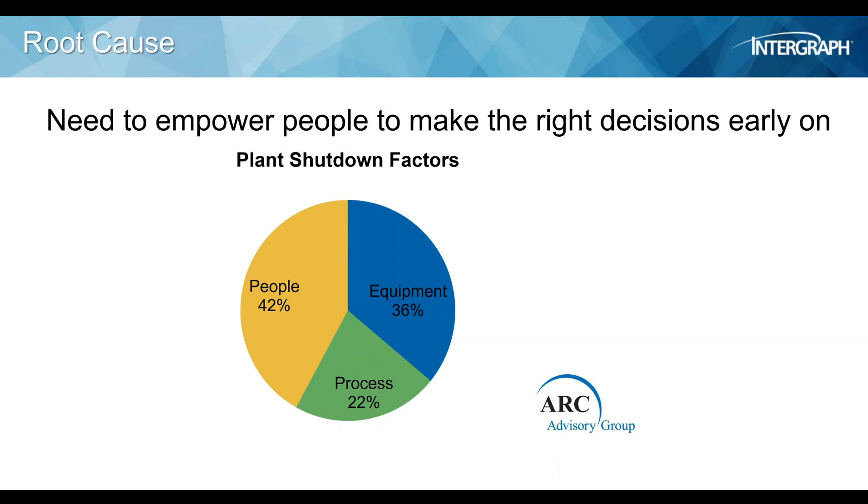It's just the fact that we need to empower the people at the plant with the right information. Right? I say information or data, because to me information is the data in context. That's very important, to have that information in the context of the task that you are performing. And I know for sure that we can definitely lower that 42% number, because obviously that's not a good thing. Here you see some other numbers from ARC, very interesting, that of course the biggest revenue loss is from operator error. And like I said, it's not intentional, it's just not having the right information at the right time, and with that not making the right decision.

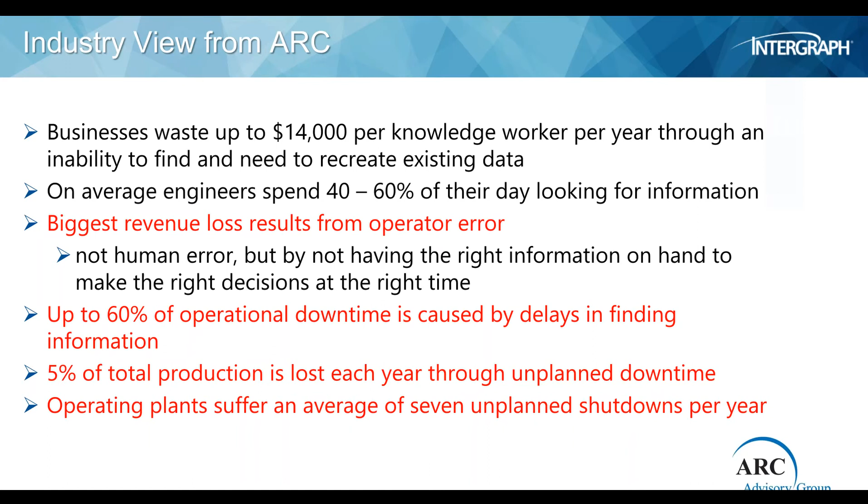And you see 60% of the operational downtime is caused by delays of finding stuff. Even I as an engineer, I know that I spend a lot of time finding stuff, and that's kind of not fun and boring. You want to have it quickly there and spend your time on the real work you need to do, either engineering or operating the plant. But you see tremendous cost is involved when you of course shut down a plant. On average 7 unplanned shutdowns, that's terribly costly. So we definitely need to do something about it, and I think we can do something about it with this engineering design basis.

Of course, the challenge is that these days these projects are very complex, and some of them are very large. I've seen projects like LNG plants that have 2,000 P&IDs. It's a huge facility in the Middle East, and for an owner-operator to check all this data and all these P&IDs in these fast-track projects, which seem to go faster and faster every time, is just a challenge, and it is almost impossible to do that by hand. And I'll talk a little bit about how a computer can help with that goal, to make sure that you get what you want, not only to build the plant but also to actually operate the plant.

That's a challenge. But like I said, I'll talk a little bit about how we can maybe help with that challenge to make sure that you have a solid engineering basis and can have the benefits of that in operations. Now, starting at the end is also making sure that you ask early on what you want as owner, and owners do that, and one of them is Saudi Aramco. I worked with the Saudi Aramco company for many years, and I think they did the right thing. It's a smart thing to, very early upfront, before you let the project, tell the EPCs what you want at the end.

Because sometimes you create like a P&ID, or you create like instrumentation. As an EPC, you only have one objective, and that is, get enough data to buy, install, and maybe commission, and that's it. But of course, after that, the owner takes over, and maybe he wants some additional information that he thinks is important and can help him in the operational phase. But if you don't ask, you don't get. And if you ask after the fact, it's going to be very difficult and or very expensive.

So that's what I said, start at the end, make sure that you define it up front. It's a lot cheaper, and it's a lot better, and it will get you the engineering information in the end that will help you in the operational phase.

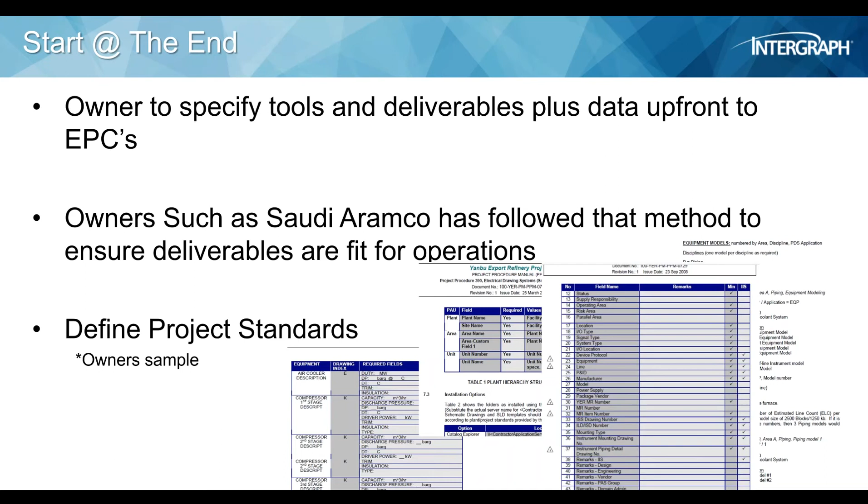So I want to get your opinion about what I just said. So we have a little poll question about what you think. So Ashley, maybe you can execute the first poll. We have two of them, later one more, to see what you think about that. Thanks, Frank. Yes, everyone, please select the answer that best applies to you.

Is finding the right information in context a challenge? Yes, we have challenges with accessing up-to-date information, or yes, but we will find it, it just takes longer, or no, we have it quickly and correct, or you don't know.

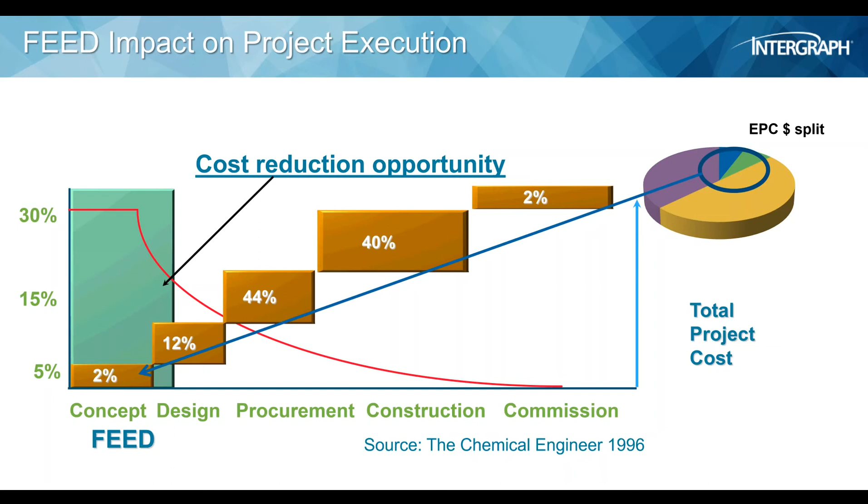The same is this domino effect. If you make some assumptions, that's what engineering is about, making assumptions early on and then refining it till you finally have the final design that you're going to implement. So there will be changes, of course. I don't think ever a project will be executed where everything is right in the beginning and you go one time through this whole workflow and be done. No, there are iterations, but of course you want to minimize this rework and iteration, so make the right decision early on. That's the trick, and not have this ripple through effect, or at least minimize the ripple through effect there.

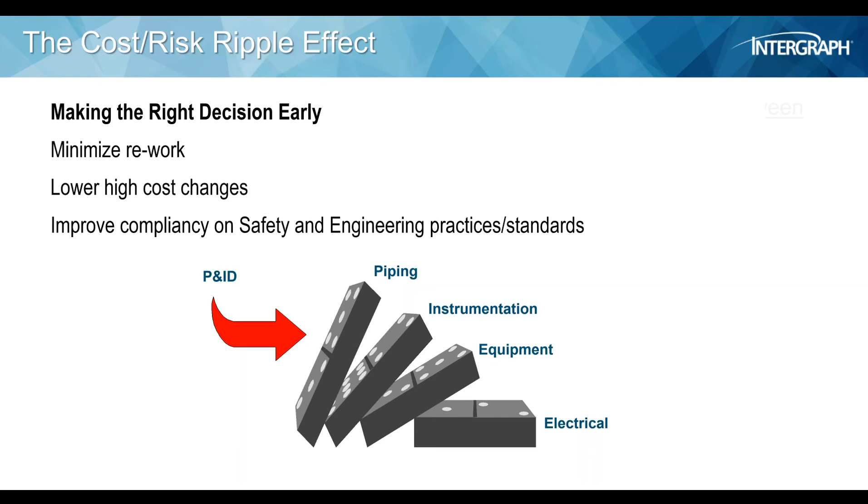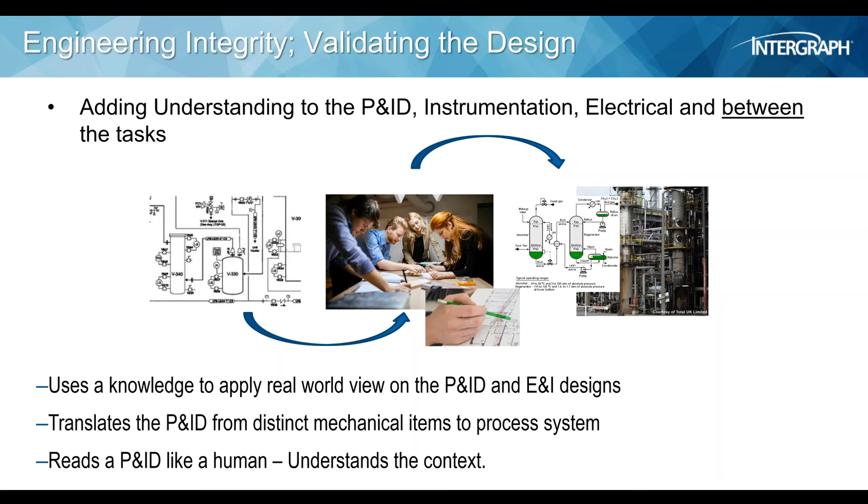So we need somehow to capture that information, capture that data, and automate that checking, at least for the bigger part. So we want to check on the topology, the data, the visual, the drafting stuff, like the right labels and symbols, because in the end, these deliverables, it's not only the P&ID, I just take that as an example, but they'll be printed and somebody has to read it, even if he takes it in the field. He wants to know if this valve is car sealed open or not, and that tells him something about how to maintain and operate that particular component. And of course against the standards, like I said, there are many of these, and also your own company practices and standards.

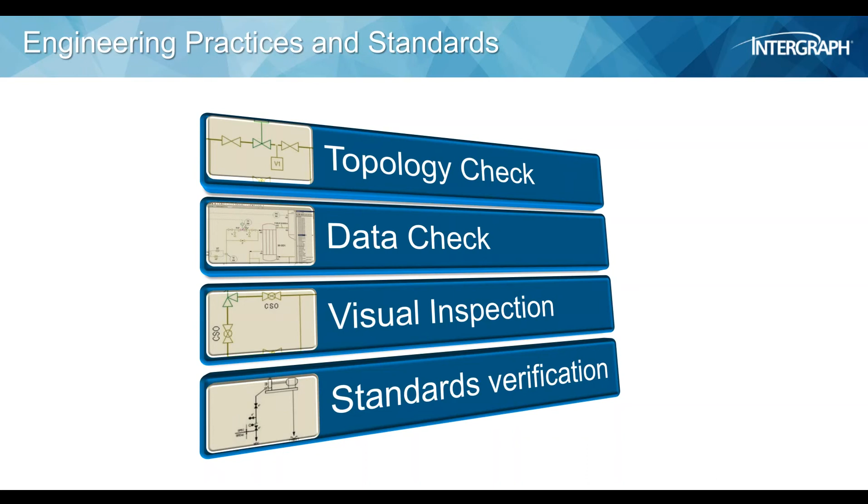So for instance, I have this little example, it's very, very simple, but you see this pressure relief valve configuration. All the piping and everything is hunky-dory. Now you have to basically test that pressure relief valve to make sure that the setting is right, it operates right. It's a safety instrument, so it needs to be correct. But little problem, if you can see, on the top line there is a drain missing, so they basically cannot isolate and drain it to safely test it. That's a problem. It can cause people to say, okay, I'm not going to test it. That's going to be later maybe a safety issue, so you don't want that.

So you want to make testing and checking up front that yes, this valve is there, and we can actually do that, and we can automate that for you to make sure that the design basis is right. So if the operator goes in there and wants to do the testing, then yes, all the components are there in the right place to do his work.

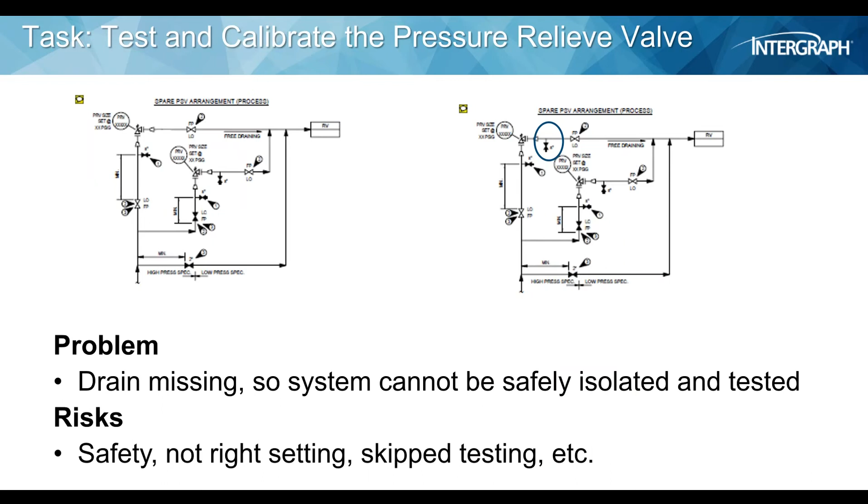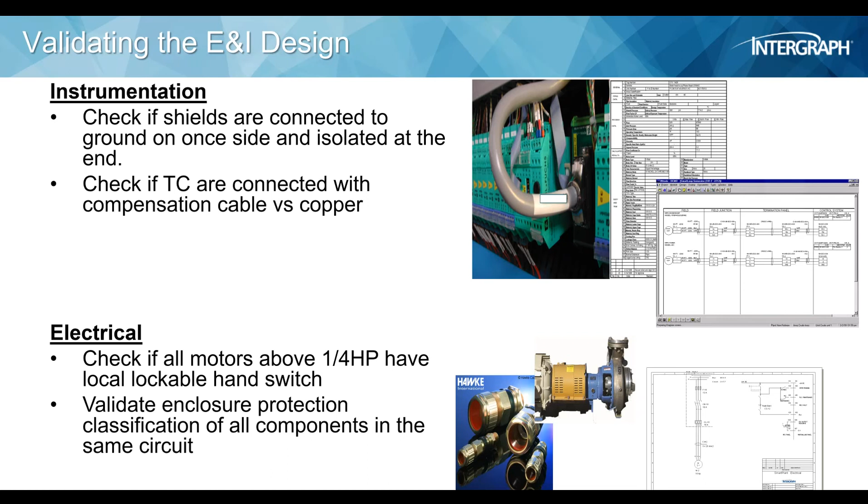And of course, I took the P&ID since that's such an important document for the plant, but the same thing for instrumentation, it's also very important. Check if you have the right cables for thermocouples, for electrical, if you have the hand switch when you do lockout, tagout, when you put your hand in the pump and somebody can switch it on. That's not very healthy, and have the right enclosures with respect to area classification and so on. So you can check that early on, so you have the right stuff, not only within the disciplines, but also across the disciplines, like across process, the P&ID and instrumentation.

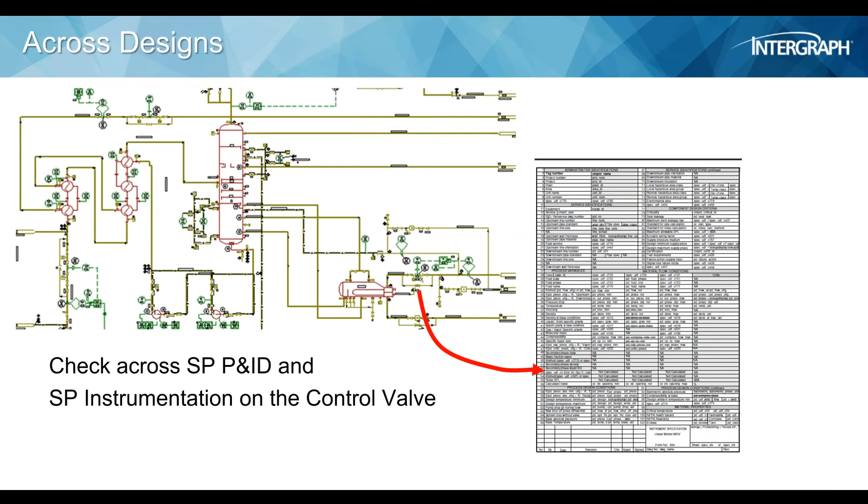Make sure you have the right valve, the right line sizes, the right process data to have a consistent data there for later on if you want to do some maintenance or replacement of that component.

Now the cool thing is, and everybody these days is asking for dashboards, so that's very fashionable, I guess. So we also show you here a little dashboard, and it's obvious that red is not good and green is good. But nice thing is when you're at the plant and you have done some of these checks against the design, because there's always changes during the running of the facility, so you can do this check on the EPC side, but also at the owner-operator side.

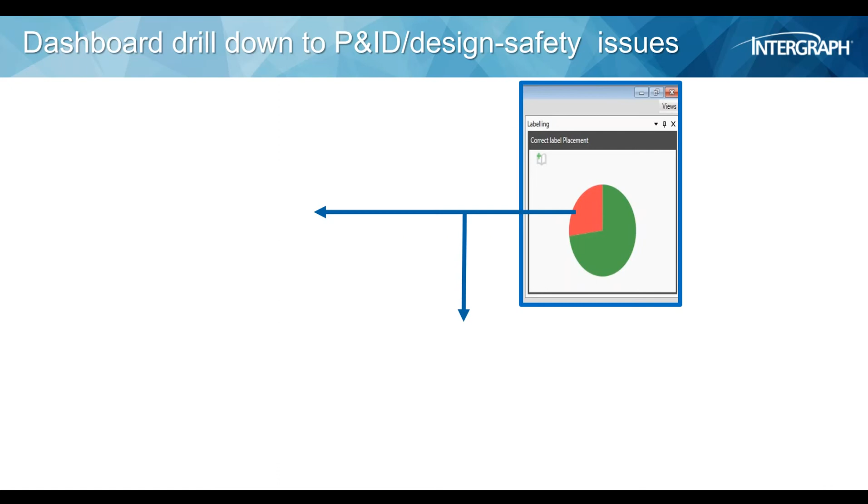You can actually click on one of those little tiles and navigate to see reports, and also actually a picture of, hey, what is actually wrong there? Can I live with that, or can I not live with that, and fix it?

But the thing is that you have all this information at your fingertips, and it's coming from one single source, rather than, I have my own P&ID in my desk that I marked up for the last 5 years, but somebody else has the same P&ID in his own desk that he marked up for the last 5 years, and guess what? They'll never be the same.

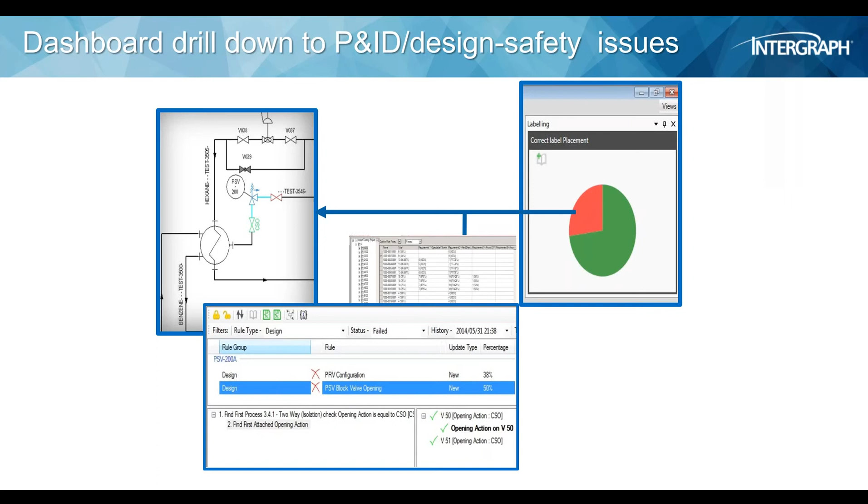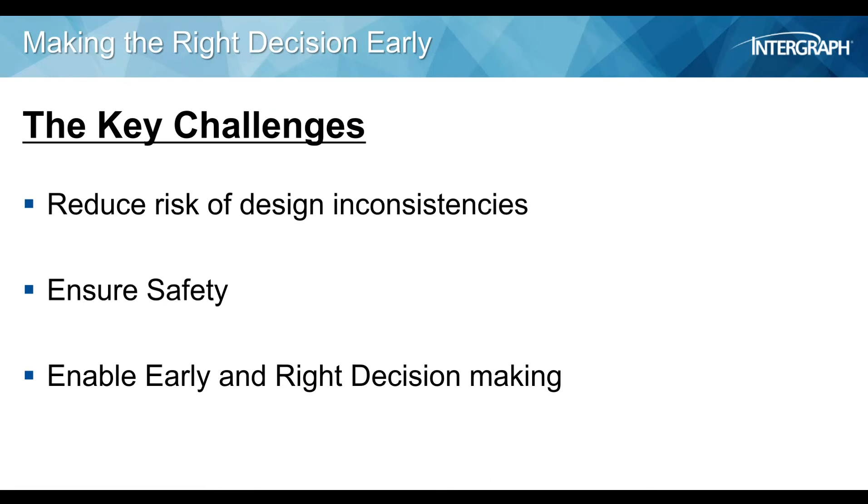So once you have the engineering design basis created, you started at the end, you have defined everything, you have everything in place, and now you want to use it. And I'm going to give you some examples. So, of course, you want to reduce the risk, safety, and make sure that the guy has the right information to make the right decision, and not fall in the category of the 42% that accidentally pulls a wire or something to shut down the whole plant.

That's bad news. I understand that engineering systems like P&ID, instrumentation design systems, and so on, are not mission critical, as I call it, for a plant. What I call mission critical systems are like a DCS system. I have never seen a plant run without one, so you have to have that, safety systems, process systems. ERP, these are mission critical systems in a facility.

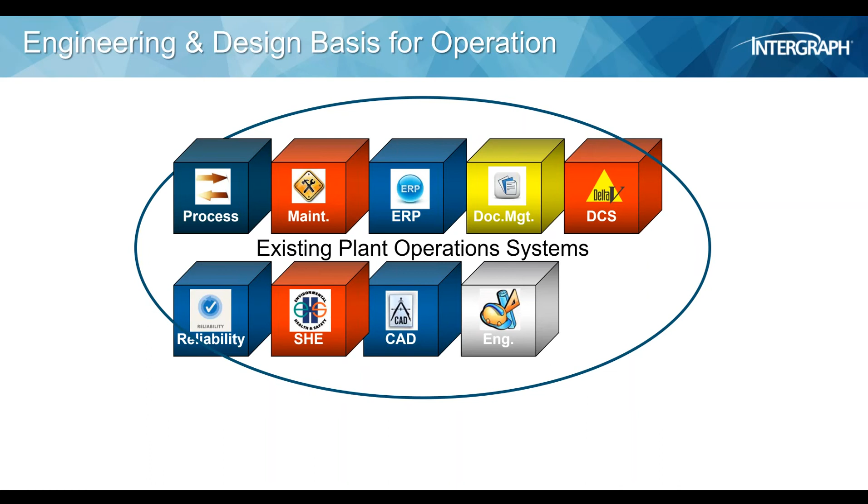However, if you look at those, you see that most of these mission critical systems have some kind of need of this engineering data, engineering and design information. DCS, of course, looks at the control system data, the safety system at the P&ID and process data, and so on and so on. So the engineering and design basis definitely plays a critical role in mission critical systems that you have on a plant.

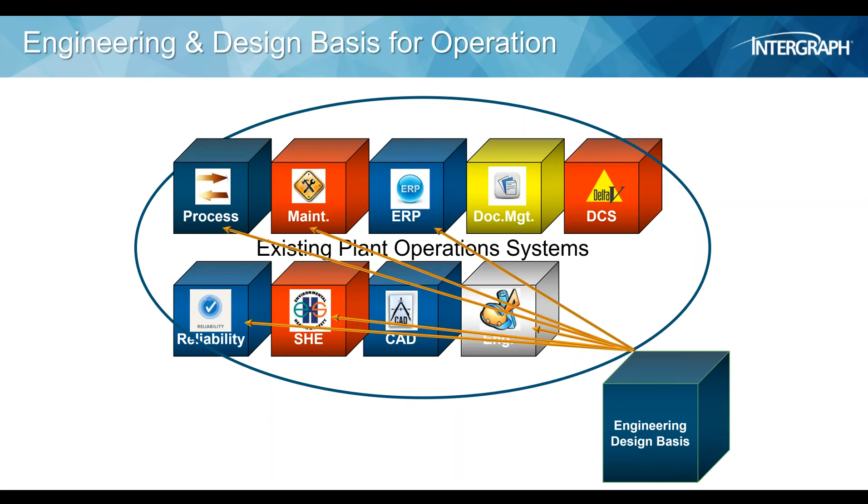So I mean, if the P&ID system goes down, the plant doesn't go down. If the DCS system goes down, the plant probably will go down. But 1 and 1 is 3. If you have both of them up, I think you can leverage that information and capability to help you lower cost and risk. Now some examples.

Now this particular maintenance guy in a plant in China, you see on the picture maybe that he has a little sniffer there that he holds up to the flange, and what he does is LDAR, leak detection and repair. So he has to go to the plant with his sniffer and collect the data and see if something is leaking, and of course if it's leaking too much, something needs to be done. So they use the P&ID as the roadmap for the plant.

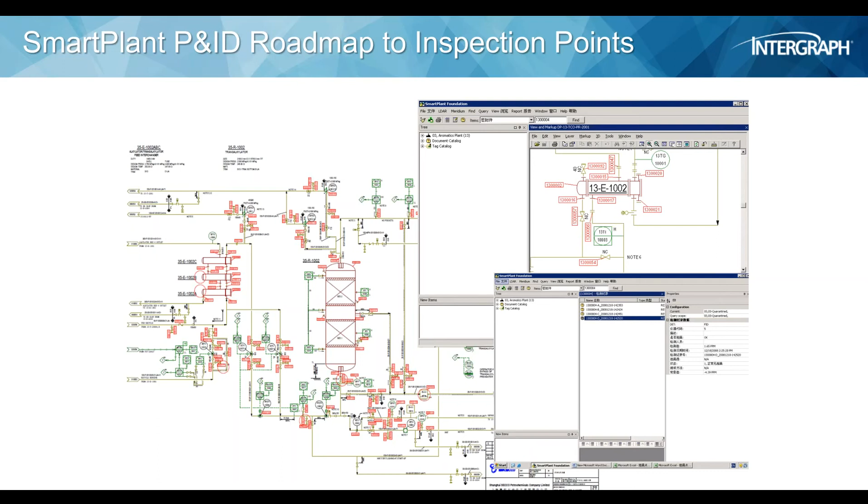And you see, I don't expect you to read all the numbers, but the red little tags are the points that he has to go to with his little sniffer, and we can actually tell him when, and keep track of it, and manage that he doesn't skip anything and does it all in time, and so on. So once he collected that information, he can do a risk-based inspection with the system out there.

And if this thing is leaking too much, then it can actually be given to SAP, and a work order is issued to replace something, fix something, whatever is needed, and then update the design, and voila, you have the updated engineering and design basis for the next round of checks. But you can see here how the P&ID is actually helping manage and make sure that this LDAR is executed right. And it could also be a safety issue because there's something leaking that could be flammable.

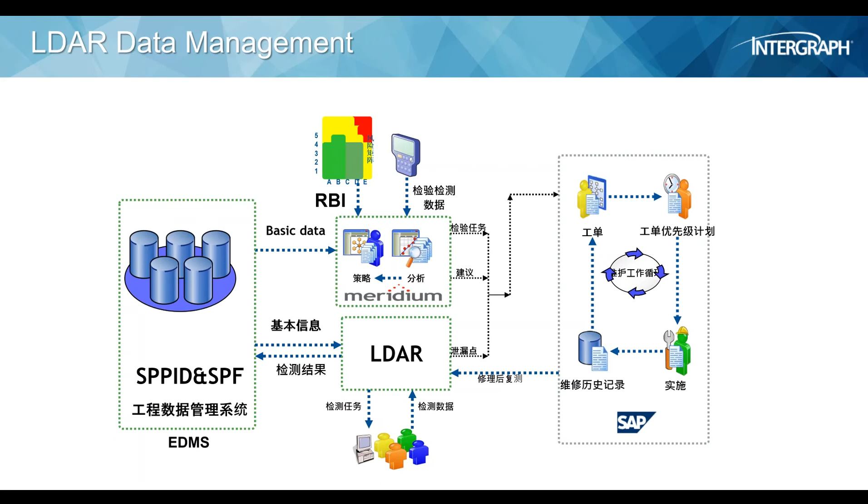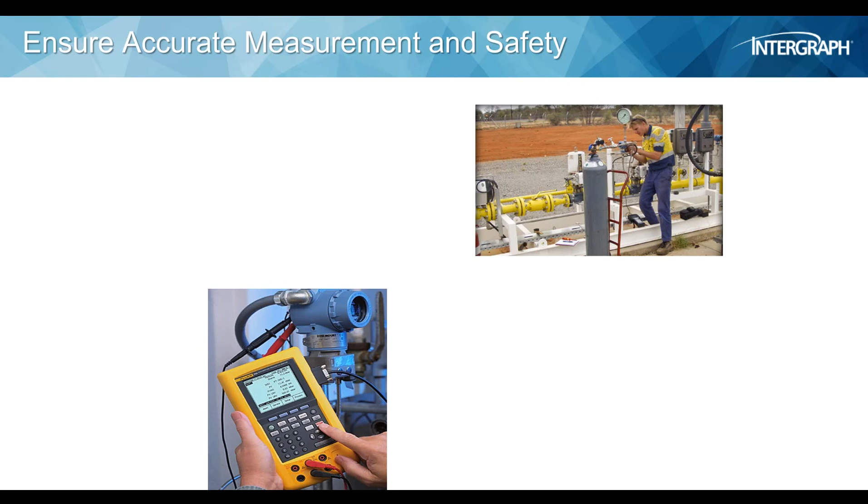That's also another good thing. Instruments, very important. Instruments, of course, play a role in safety, like we just talked about the pressure safety relief valves, but they also play, of course, an important role in making sure that you have the right quality of product produced. It checks temperatures, levels, and flows, and what have you. But it can only check right if it's actually acting right, and you need to calibrate that. You see the guy with the little yellow box there. That's in this case a Fluke calibrator.

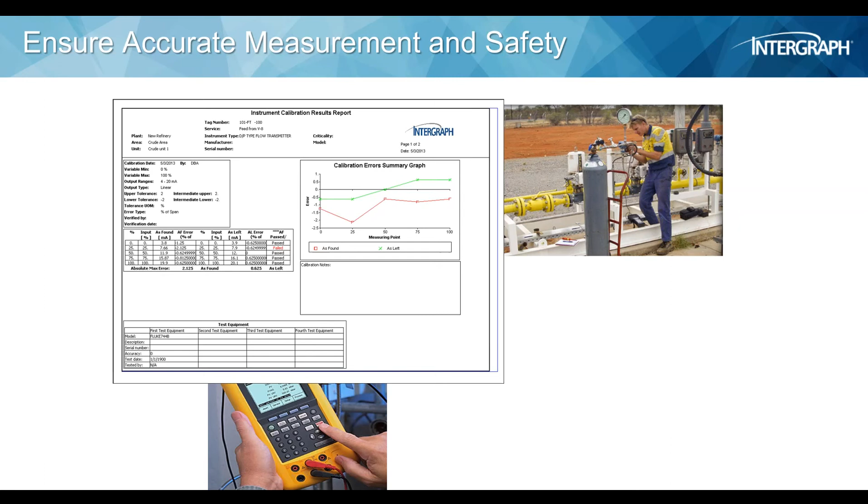Now, on one hand you have the engineering and design basis, the instrument data, the specification of this instrument type and how it is behaving. Now the nice thing is when you calibrate them and you upload it back in the system, you can actually do what they call as found, as left, and of course recalibrate, but you can also see how this instrument is actually behaving over time, and that may give you the right information to make the decision that maybe this is not the right instrument for that particular task and replace it.

So you have to do less calibration or fewer set points than with this particular solution you have right now. So that helps with safety, it can help with the product quality, it can help reduce cost, so that you don't have to, for instance, calibrate the thing every week or so.

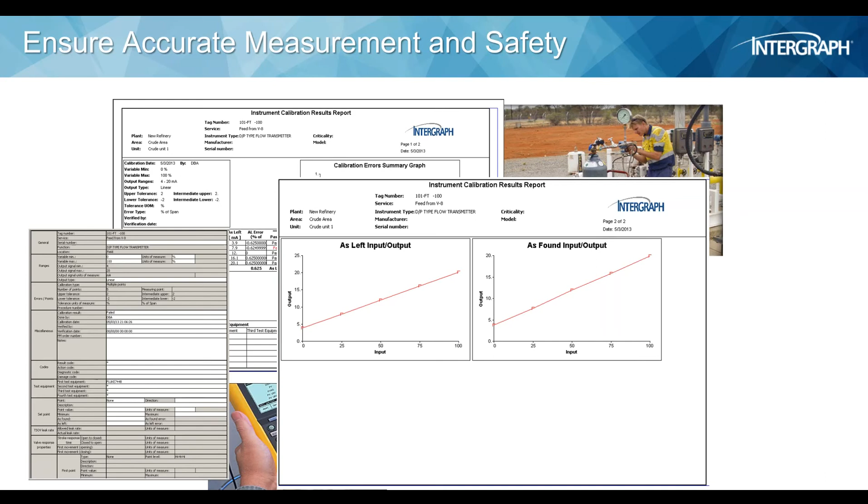Another example is, of course, when you want to do some maintenance on a piece of equipment, you want to make sure it's isolated, electricity switched off, like I said before, and have a lock on it and a label and all that, but also the process, you have to close down all the block valves, and to find them, the engineering design basis can help you locate those, because when you have all the lines in an intelligent and connected way, you can navigate back from the equipment you want to isolate to the first available place to isolate it.

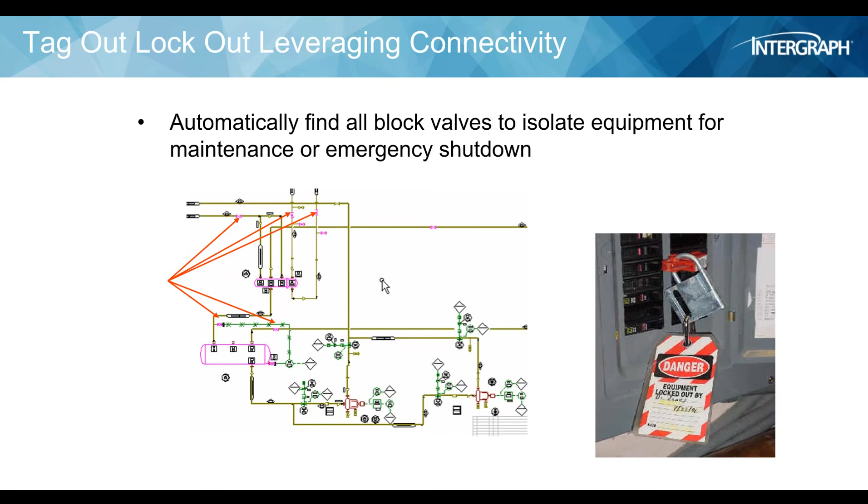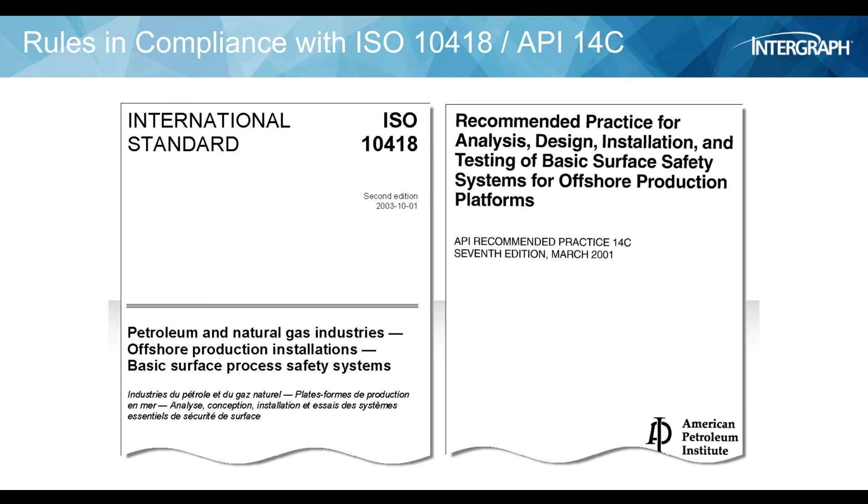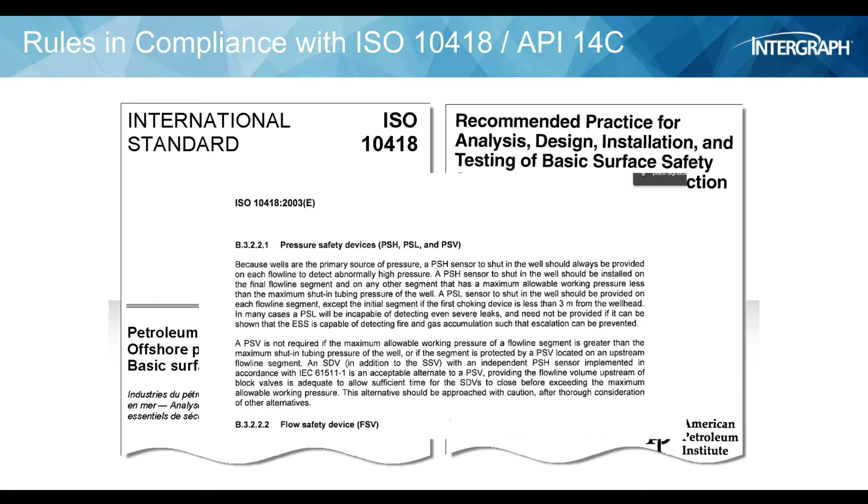Now safety, I told you already, there are all these standards out there. This one, ISO 10418, is dealing with safety systems on offshore platforms. And there are a whole bunch of rules in there. This is just an example of how they hook up a pressure safety valve and all the equipment around it. And this is just a procedure, but then this has to be translated into the design. So in this case, you have a vessel and all this stuff around it, and how you check that this is in compliance with these rules and stays compliant is that you can check that with some rules in the engineering and design base.

So you can check the design. If you make changes, you can recheck it, make sure that it is still compliant with these standards. For instance, that you have the right components, the right piping, the right pressure setting. You don't want the pressure relief valve to have a higher setting than the vessel. It would blow the vessel before the valve opens. So that's not the intention of the protection.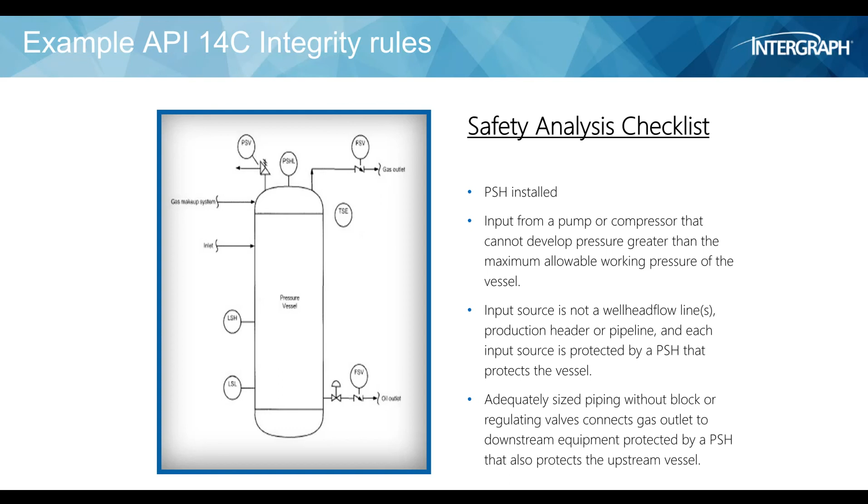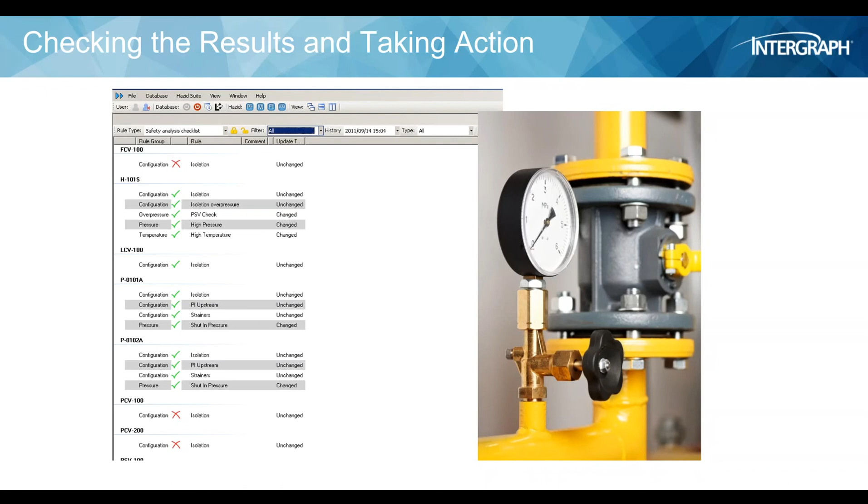So once you check that, we can create these reports, and of course you see the green ticks where everything is fine, and the red ticks where something is not in compliance anymore, and you just have to check it, make sure that it is right and not discovered after the fact. That's not good news.

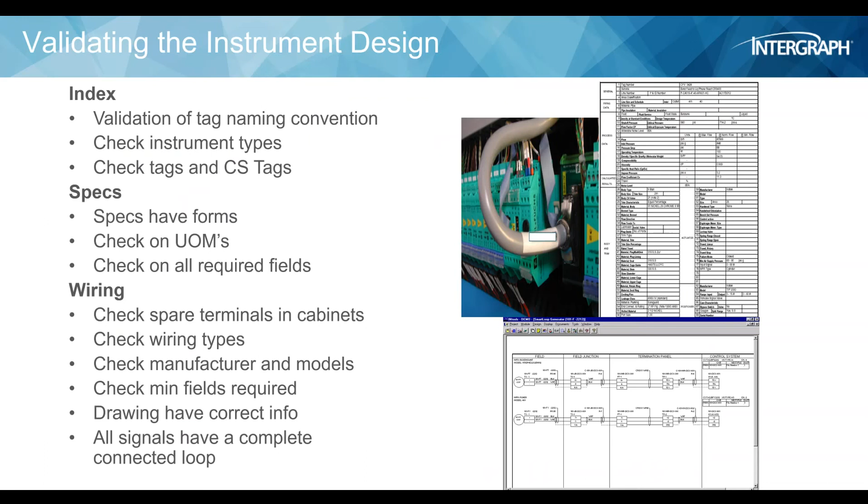I gave examples earlier too, because I don't want to give the impression I'm only looking at P&IDs, but instrumentation, same thing. You can make checks at the engineering phase, but also at the operational phase, that your engineering and design base is solid and sound. Same with electrical, of course, whether you have the right cables and the right enclosures and what have you in the electrical design arena.

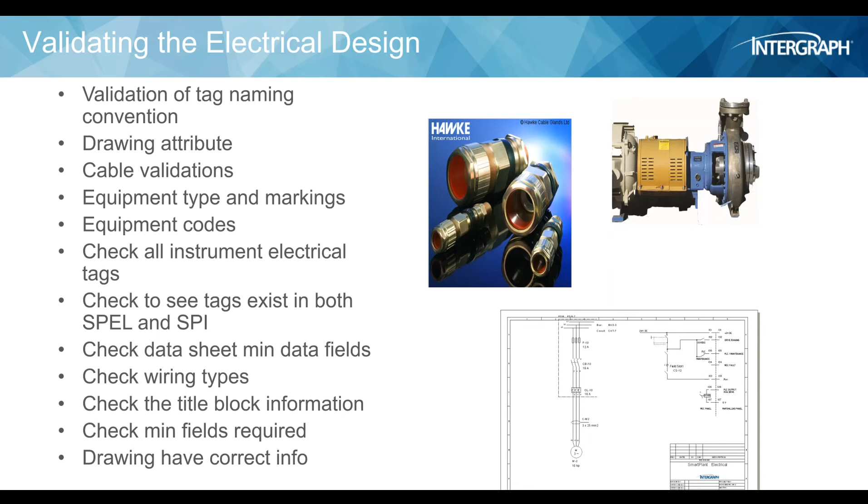I like this picture. I just put it in on the P&ID. I guess coming from the process side, P&ID is one of my favorites. But this is a picture, and it looks okay. It looks cool.

Most engineers are, I guess, a little visual oriented, like myself. You look at it at first glance and you say this is fine. But if you look twice, you see that the PIs are nicely aligned. That gives you an impression that it is looking good, but if you look closer, you see that one has the check valve directly after the discharge, and the other one actually has the check valve after the PI. So the location is different, and it's not right.

So it's not consistent. Sometimes, when people make changes, you have to keep on checking if it's still correct with your practices and engineering practices. So you keep the design base right.

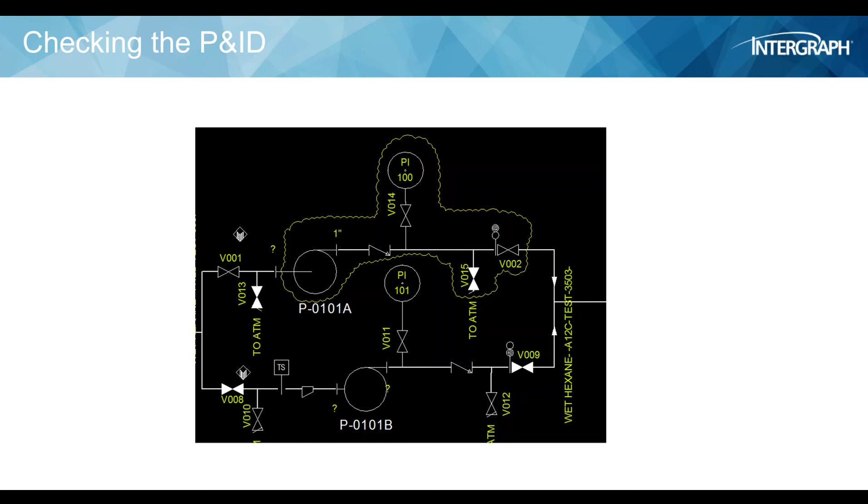And these rules, some people ask me, they said, yeah, that's all nice talking about these rules, but I'm not a computer scientist. Well, I tell you I'm not either. These rules are not so difficult to make. If you know about engineering, anybody that knows that can make these rules. There's a simple way of basically nesting all these questions into a simple user interface and making these rules. So you can make rules for your own practices, your own safety standards, and what have you.

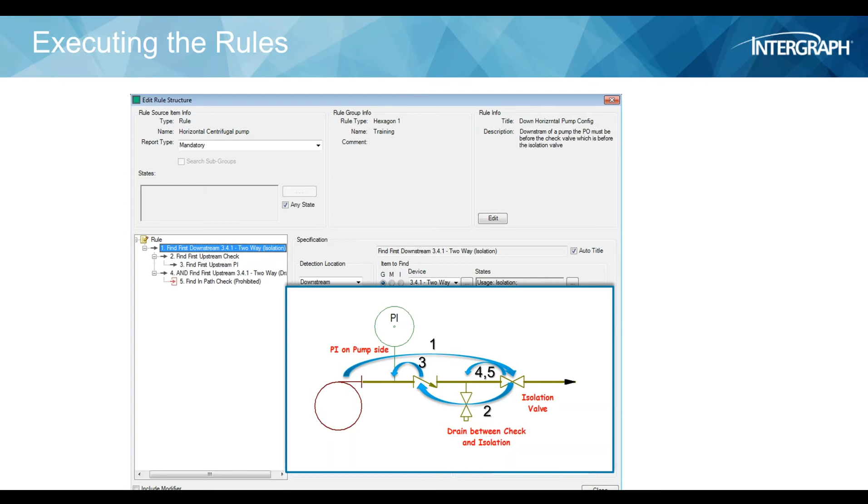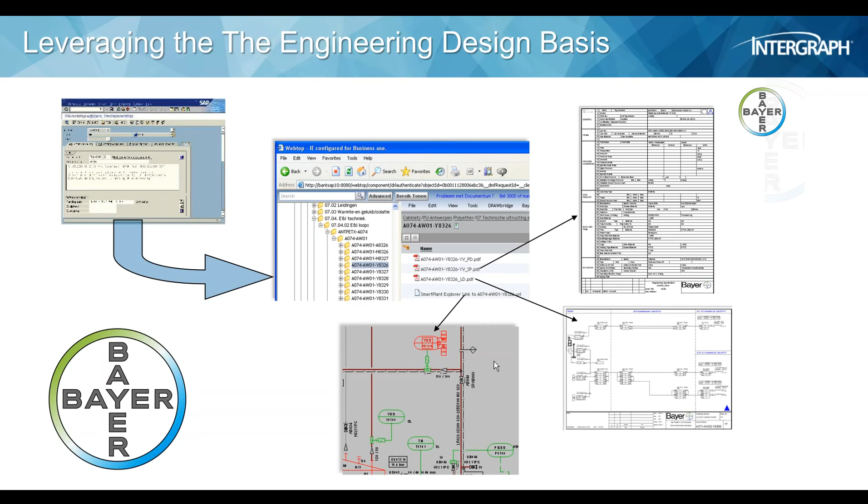Another example is the company Bayer. Actually, this is their plant in Antwerp. They renamed their facility; this is a Covestro company, but it is the same method and the same thing they're doing. They use a web-based viewer to access the engineering and design base. So they can see the P&ID, the data sheet, the loop diagram, as you can see here. What they like to achieve is, of course, safety and reduced search time.

They got this little web tool, and they can do a simple query for the people out there in the field, at lower cost and of course super fast. And then they can initiate the notification to their ERP system, SAP in this case, to make some fixes. But the whole idea is that you have a single source, the engineering and design base, that everybody can access using this web tool, and get the data to make the right decision at their fingertips.

If you want to go to an instrument and unhook it or do something with it or replace it, then you can get the information to see, okay, if I do this, what can be affected, what's the spec, what is the wiring, and so on.

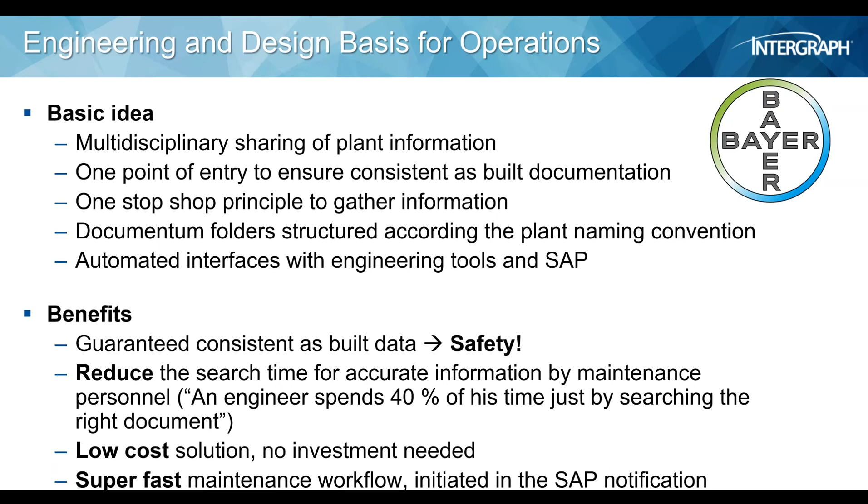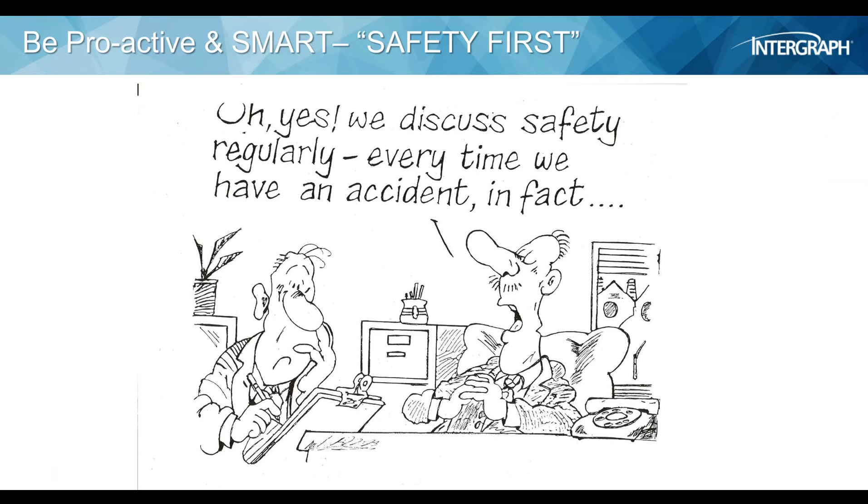Let's talk a little bit about safety. You see these guys, they discuss safety every time they have an accident, which is not a good thing, after the fact. We want to do a little better and go from a reactive type of setup to a safe, sustainable, operationally excellent one. That's what we want. You will see that when you do that, your cost goes down and your production levels go up. So you need to put procedures in place and access to this engineering information in place to facilitate this road from reactive things, like the two guys on the slide before, to safe, sustainable operational excellence. And it is definitely possible.

Part of it is also people. You have to make it part of your culture, and you have to train. I understand that. That's a big part, actually, I think. But in combination with that, you have to have the right tools. You have to have the right information to make that happen.

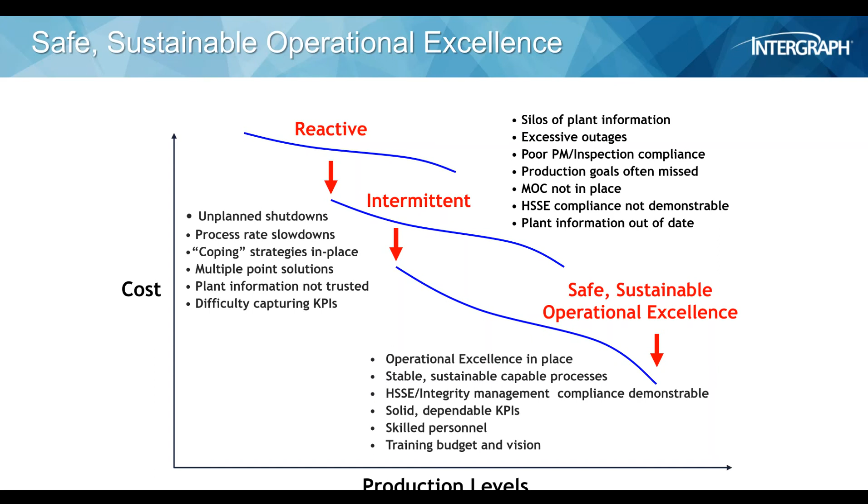You see here the OSHA 14 elements, a whole bunch of them. I'm not going to go over all of those, but the bottom line is that there are solutions out there that can help you with these 14 elements. And it is about requiring access to asset lifecycle information. Some is document management, some is 3D, some is the P&ID, some is training, but there are definitely components out there that can help you. And the engineering and design basis is definitely one component that plays a role in, I would say, the majority of these 14 elements.

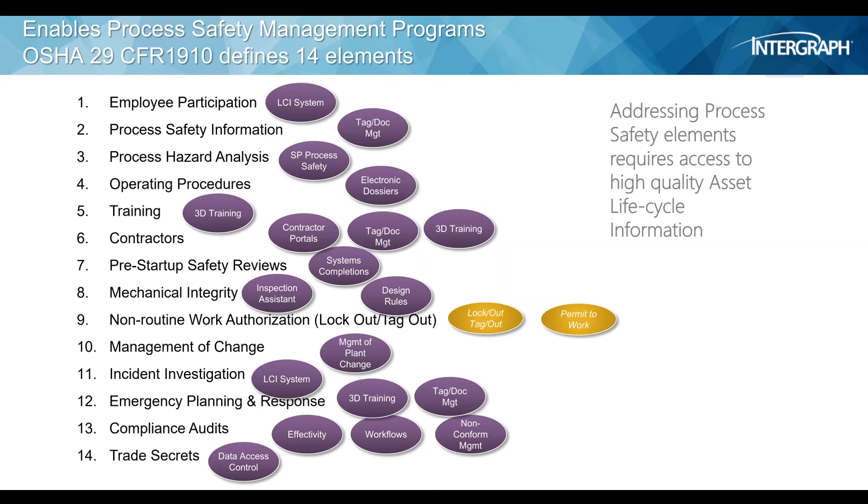Talk a little bit about safety. Now, everybody always talks about HAZOP, so I thought, okay, I'm not going to talk about HAZOP. So I'm going to give you another example. You all probably have seen this type of drawing, area classification. It's also very important.

Normally it's a 2D drawing, and with these shapes and hatching it gives you an idea where, certain times or all the time, certain gases can be present at the plant, and knowing that, you know what kind of enclosures or safety measures you need to take. You don't want to light a cigarette in one of those areas.

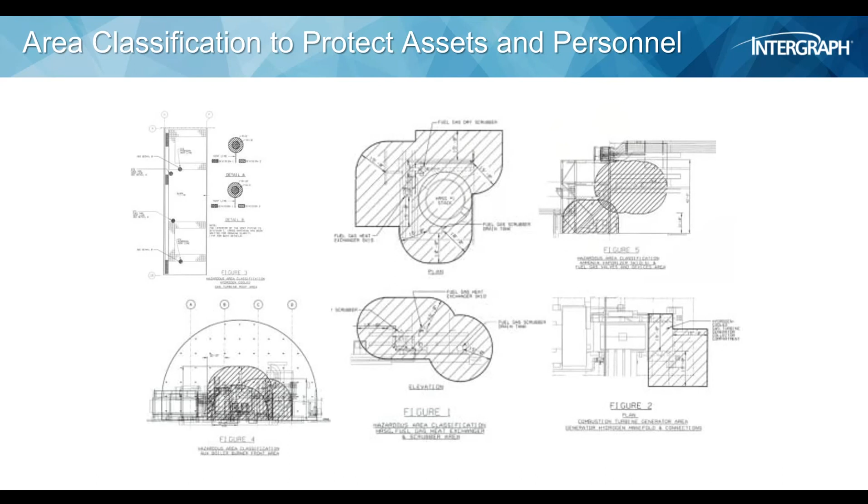And the different standards, the Class 1, Div 1, but you also got the European standards, but it all boils down to defining the areas where there are explosion possibilities, and you want to make sure that you do the right thing. We always made these things in 2D drawings. When I worked at Fluor, the electrical department was responsible for these drawings. But I thought maybe we can do something smarter there using the engineering data.

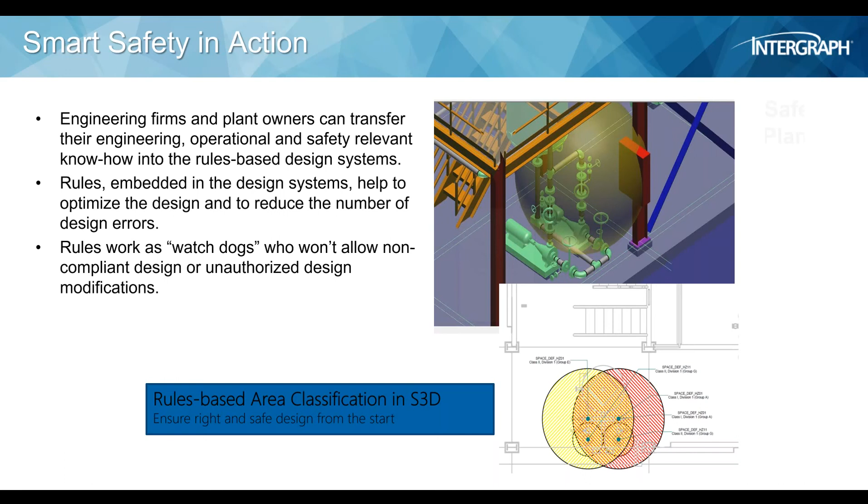So I thought we can maybe do it in the 3D model, because it is a shape anyway. It's not 2D, it's not a flat thing, and you need to identify that, and then maybe it can help you make sure that you have the right enclosures, and if you have to issue permits, that you know what's going on in the plant if you have that data right. So it's again using some rules as a watchdog to make sure it's the right stuff. So I'll show you a short little AVI on that.

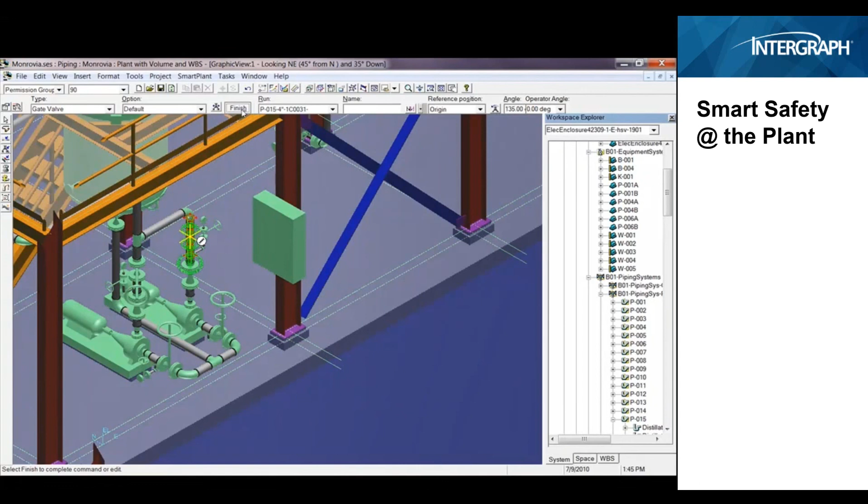Now you see the 3D model and the P&ID. Now the piping guy is taking the valve from the P&ID to place it in this pump configuration. And with that you not only get the valve, but also the process data and everything associated with it, and also the area classification. Now, we can execute rules in the background. They're constantly running as a watchdog, and say, wait a minute. Based on these rules, you can set the dimensions.

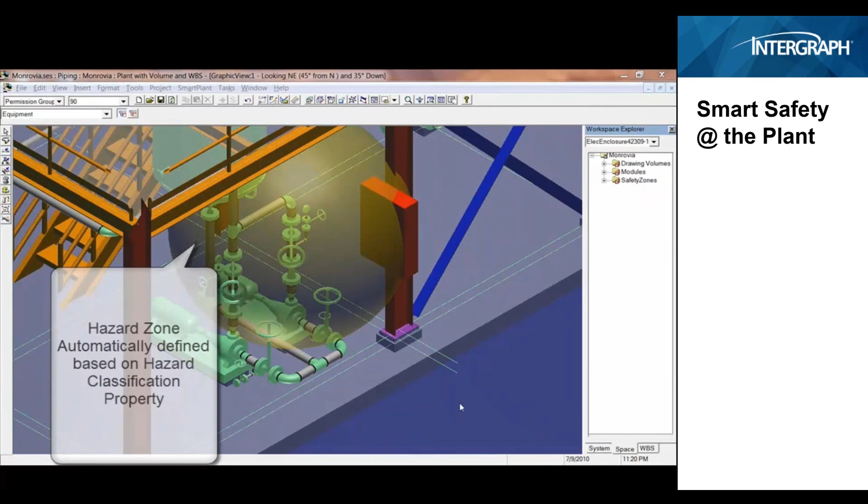I chose a sphere. You can do any shape. In this sphere you have a certain area classification. Now the cool thing is you see that electrical panel is now turning red. The reason is that electrical panel does not have the right enclosure classification for that particular area classification. So the rule said, wait a minute, you're in that zone, you're not the right panel. So now you can do two things.

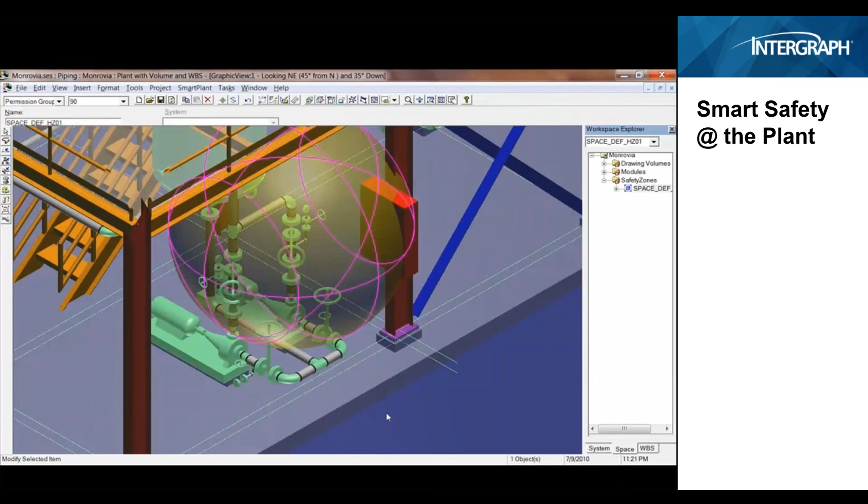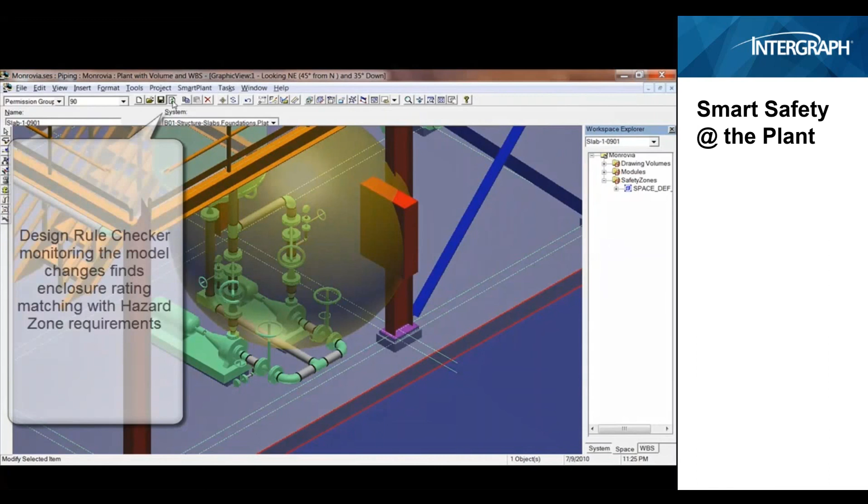You can buy a more expensive panel that is rated for that zone, or you can move it back to the other column outside the zone. If you do it early on, you have those options. If it's installed, of course, you don't have that option. Now the neat thing is that this sphere is actually related to the valve. So you see now it's green again as they change the rating of the panel.

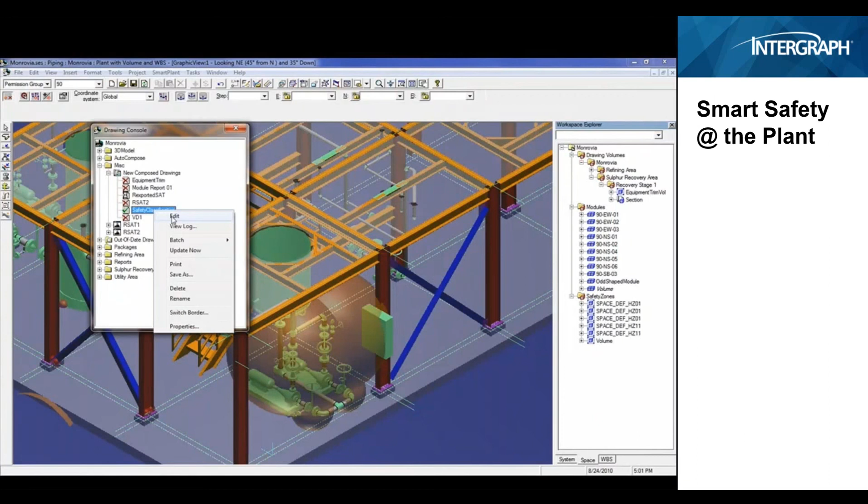But the nice thing is when the piping guy moves this set to the other side of the steps, the zone goes with it, and then the panel is again outside the zone, and you can go back to the old classification. And of course you can make the drawings out of it just like before with the nice hatching. Even this one is in color. Another one, maybe a little different than you have normally seen, is this explosion impact.

So you make the 3D model, offshore, onshore, doesn't matter. Of course, we have all these rules, so hopefully this minimizes any changes, but still we want to check for explosion impact. Now there is this company, Gexcon, I think they're coming from Norway. We made this interface with the tool. So we export the 3D model, they do their magic, and then we get feedback on what this explosion impact can do, and if you have to make some changes to your design.

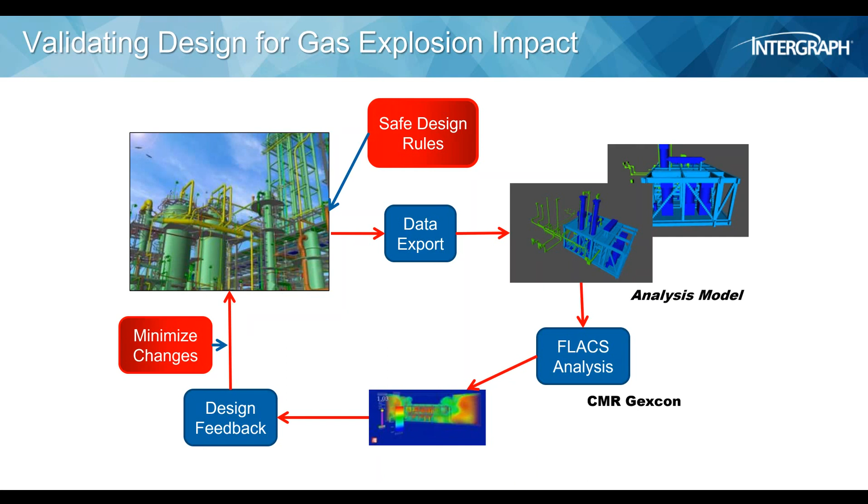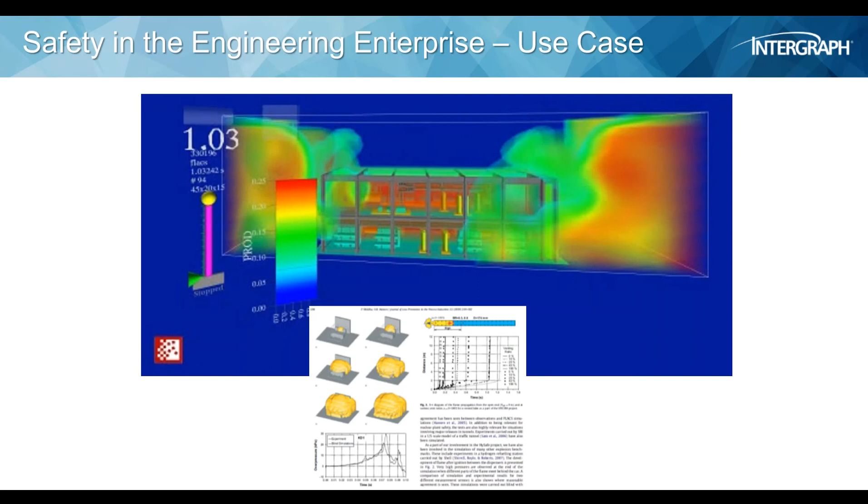These people must have a great job, because they actually blow things up and simulate these explosions, and based on all these findings they create these models, and you can see the colors denote the speed of the gas and the temperatures and the pressure, and they use that in the analysis that they do. That's pretty cool. Now you see this, I like this particular picture of this offshore facility.

You see that they simulated the explosion using the engineering and design data of the 3D model and of course of the process data. They use all that, and you see then with these colors and these shapes, when there's something happening at the wellheads, where the pressure goes and the temperature is, and so on. And now you can make decisions on

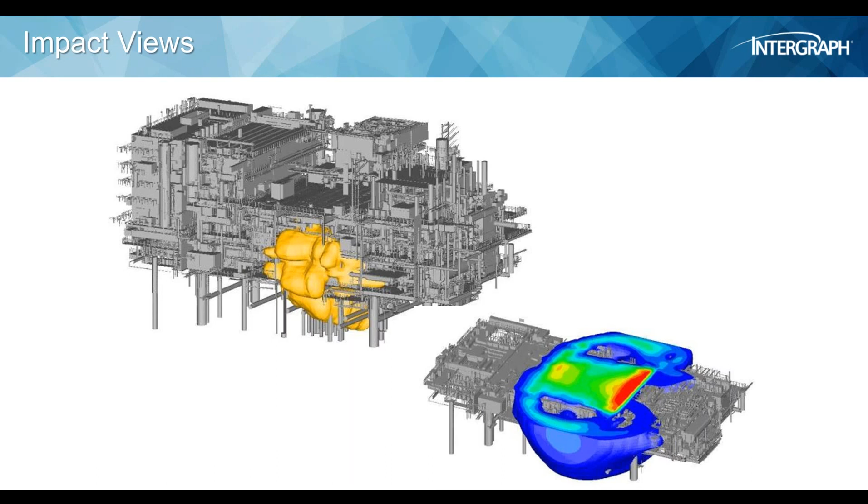protection, on firewalls, on holes in the deck to let the pressure go away, because you don't want to blow off the living quarters at the end there. So it gives you the right information to make the right decision in your design and so on. So I thought that was a pretty cool example.

All right. So Ashley, let's do another poll question on what do you think about this? Thanks, Frank. Again, everyone, please select inside the circle that best applies to you. Have you leveraged and integrated engineering data across different disciplines to support operations? No, we are in siloed applications exchanging manually, or no, but we are working to do that, or yes, we have integrated, or you do not know.

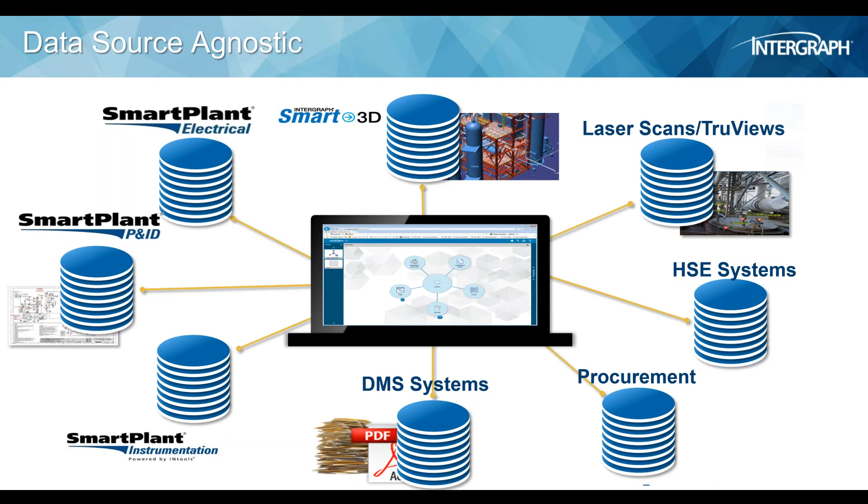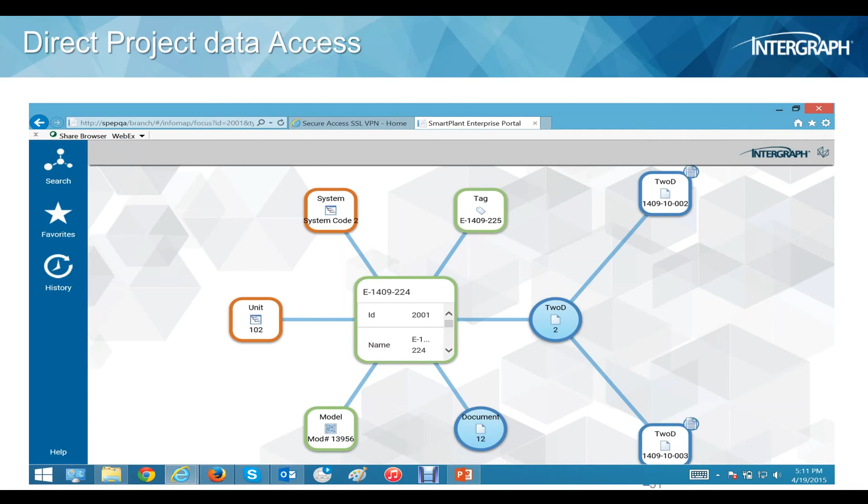So, for instance, this is just an example where you see in the middle green block an equipment item, and then these little satellites around it will just indicate related information to that piece of equipment. So you can actually navigate from the equipment if you want to see, for instance, show me all the instruments associated to it, or show me the P&ID, or show me the 3D model, whatever. You have it all there at your fingertips, on your laptop or tablet, coming from the single source, and using the rules that I described, checked, and you can trust that information. That's important.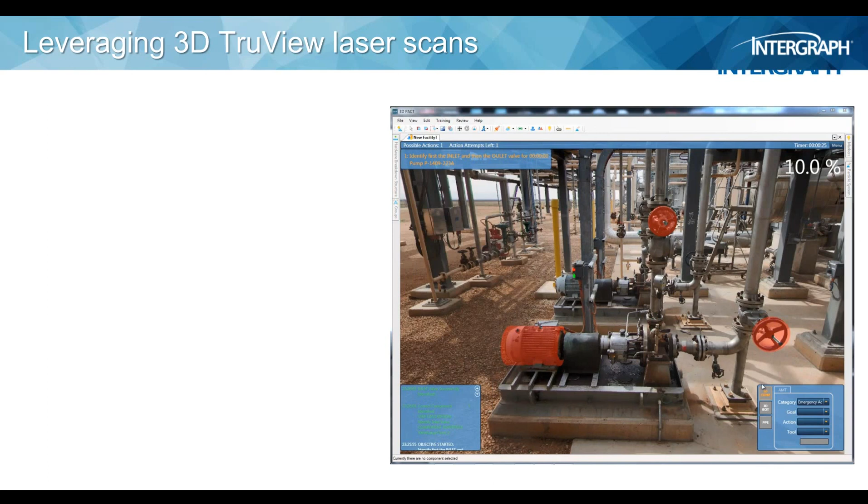And you just saw this little guy walking around there. And if you don't have a 3D model, but you want to use it for these operational type of activities, you can very easily do these laser scans, and then you can interface with, in this case, a product from a company called Semansi in South Africa.

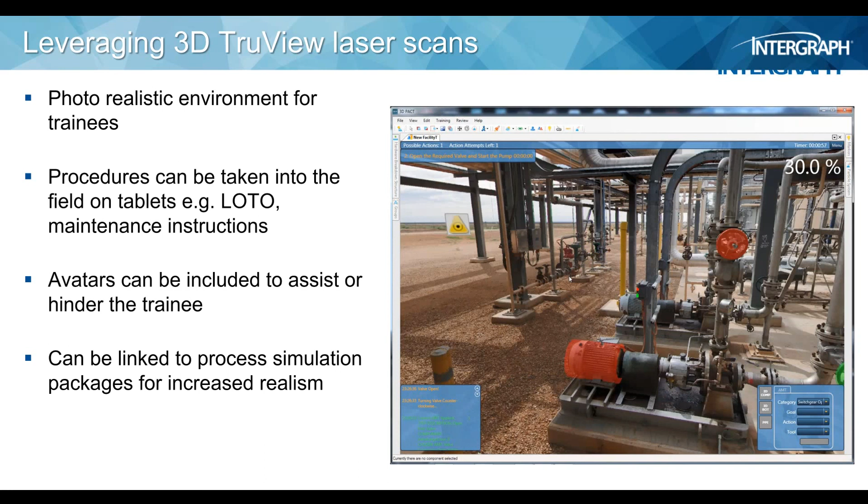That interfaces with the 3D model, and you can actually do operator training. You see all these hand wheels going red and green. You can let them do all kinds of stuff, to train them and also to put them in unexpected situations, like you can create a fire, or whatever, and then see what they can do. You can score them and so on.

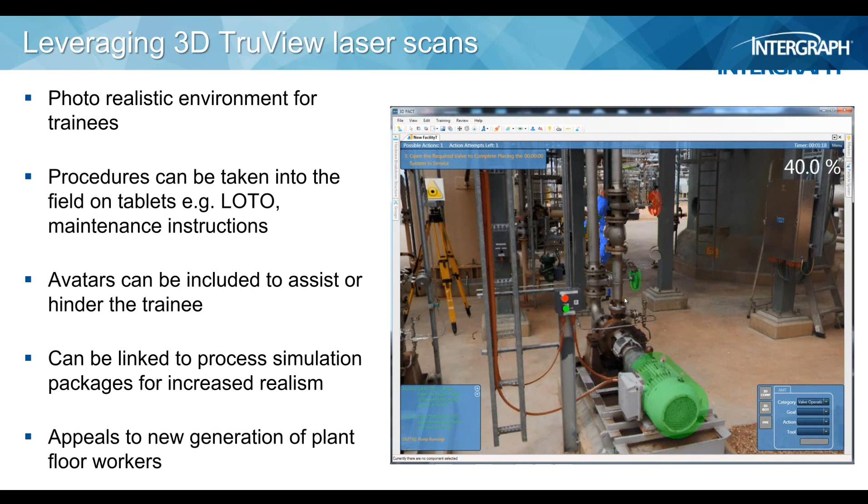So, in short, if you don't have a 3D model of an existing facility, you can create this pretty easily using this laser scanning technology, and then you can utilize it for operational tasks, like for instance operator training. But of course there are other things as well, so you can find stuff and locate stuff and plan stuff for turnarounds and so on. So I thought that was pretty neat.

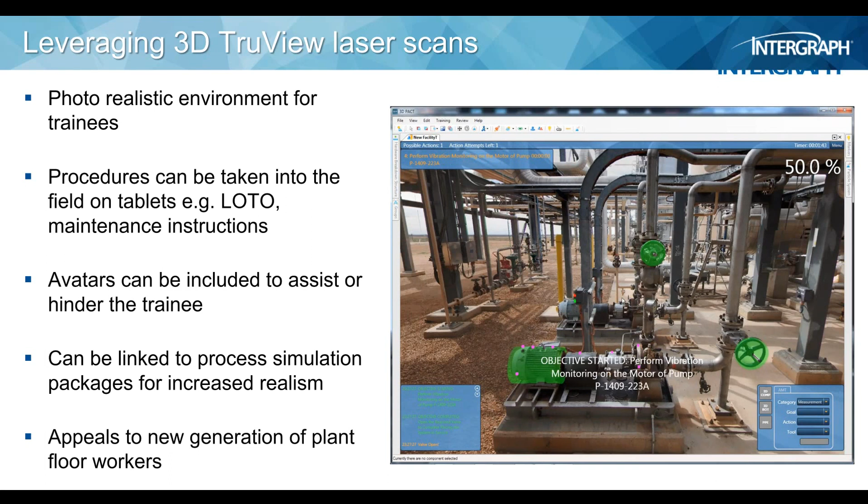All right, so coming to the end here, I hope I gave you some insight into what a solid engineering and design basis can do for you when you are in operations. Of course, you need to create one and be early on making sure that you have the right information at the end, and then have some rules to check it, not only in the engineering phase but also during the operational phase, so you keep your engineering and design basis solid and trustworthy for all the tasks that you can do. And I think it can yield a tremendous benefit.

You saw ARC talk about an average of 7 shutdowns. If you can reduce it to, say, half, let's say you have only 4, which is also not good, of course, but if you can avoid 3 of the 7, that is already a tremendous saving. Anybody that is an owner-operator would have to agree with that.

So you have to define up front your outcome that supports your business. The business drivers may be a little bit different for different companies, but be upfront, start early on, start at the end, and then you create this design basis, and I think it can be leveraged for many operational tasks. I showed you a few, to definitely lower your cost and risk.